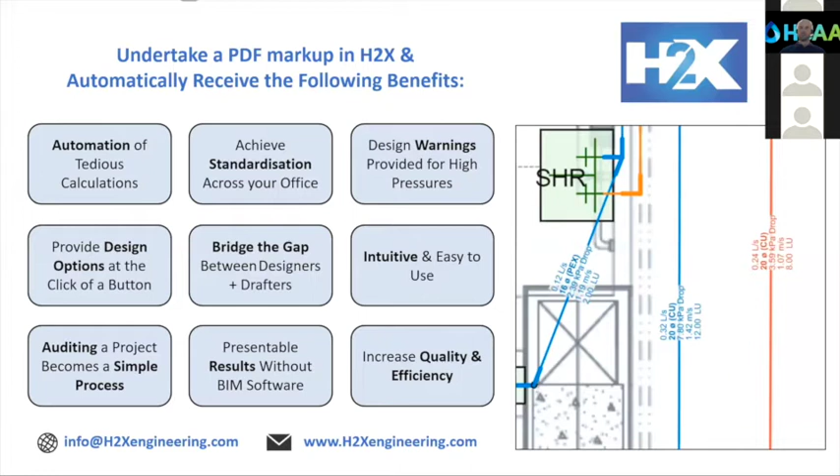So this one here, H2X, our next meeting we will have a presentation from H2X. This is one of our own members who has developed this software for pipe sizing with a bunch of other developers. I'll click this button and you'll see a video of how the software works. Basically, you use it through your browser. You load the PDF of the job you're working on, and then you can go in and pipe size and change between different standards. I won't run through it all, but we'll share more information at the next meeting. I'll show you a quick video on this now, it goes for about a minute.

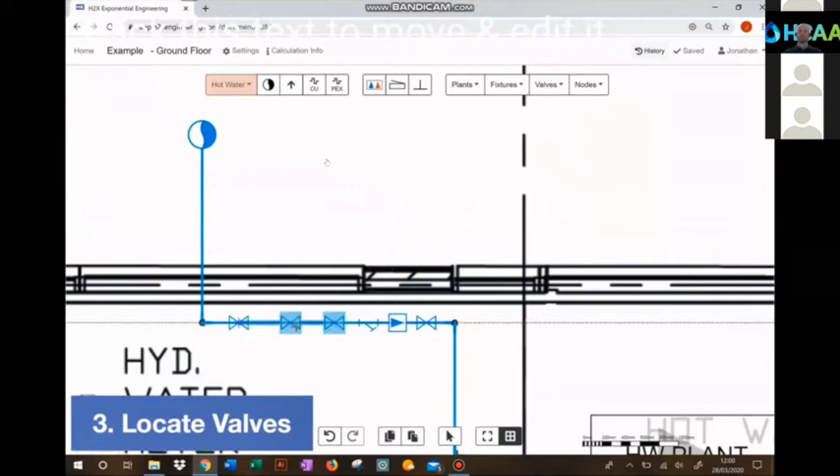Does an empty calculation folder sound familiar to you? How about drafting errors from unclear design markups? Or are you spending too many hours on a project? Introducing H2X, the digital transformation of plumbing engineering. An opportunity to revolutionize your workflows. A choice of innovation, or that is the way we have always done it, by following these simple steps: drawing lines that represent your pipe layout, stamping fixtures or nodes, locating valves, adding plant, and auto-connecting where required. You receive the following results: pipe size based on the chosen maximum velocity.

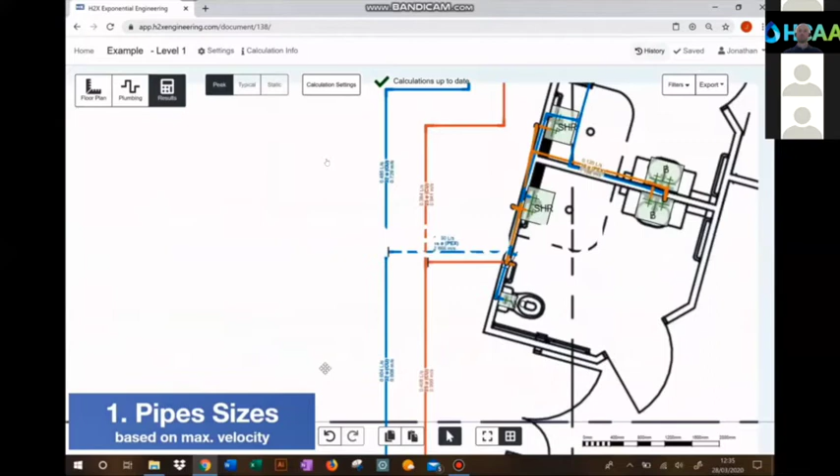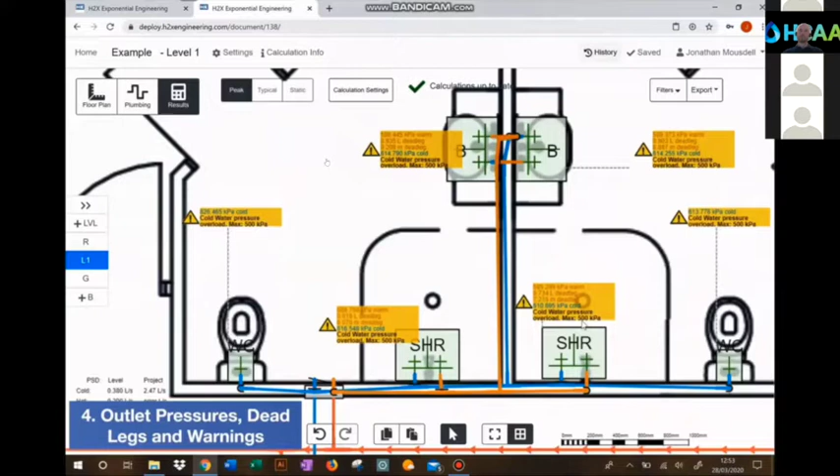Pressure loss through valves, fittings, and pipes. Hot water return pipe sizing, circulating pump duties, and balancing valve kV values. Pressures and dead legs at fixtures, including design warnings. And all results are professionally exported for your QA records. Industry-leading companies trust H2X, and they are already seeing the payoff. H2X is showing to take less than 27% of time comparatively. So choose to work smarter. Choose to empower your team. For only $29 per week. Choose H2X.

Okay, so there you go, that was a little bit of a preview of the software. I've used it on a couple of jobs now. One of the things I like, with where we're heading with the water research that we're doing, is the ability to switch between different international standards for pipe sizing and compare the Australian standard to an overseas standard. Depending on some of the data we're going to collect over the next 6 to 12 months, I think this kind of software takes us to places we haven't really been able to go before in a really fast and efficient manner.

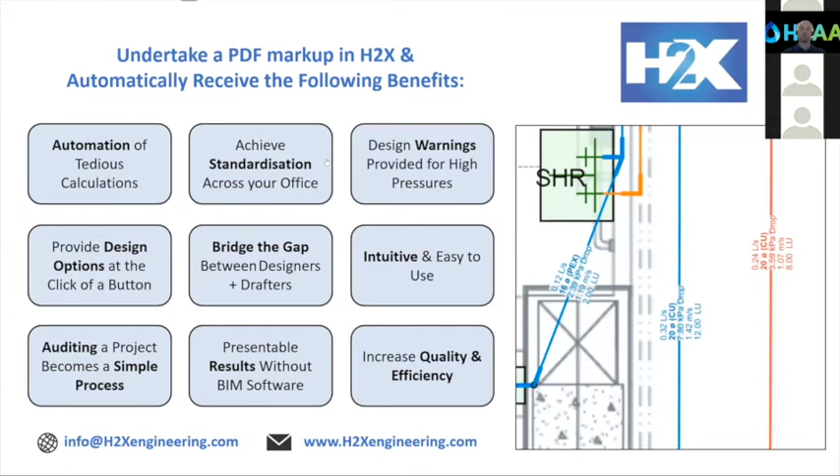For all the affiliates out there, we were planning, if we had this meeting face-to-face in Sydney, to have Stoddart come along - they've got a new toilet suite that they've released for prisons. The plan was a live demonstration as our CPD session prior to the meeting, put on some safety goggles and see if you can break this toilet. But because we weren't able to do this, this is Stoddart's opportunity to showcase a new product that I think is very creative. If you're an affiliate out there with a good new product you think would interest our members, please share it with us while we're stuck in this environment of online meetings. So hope you enjoy the video.

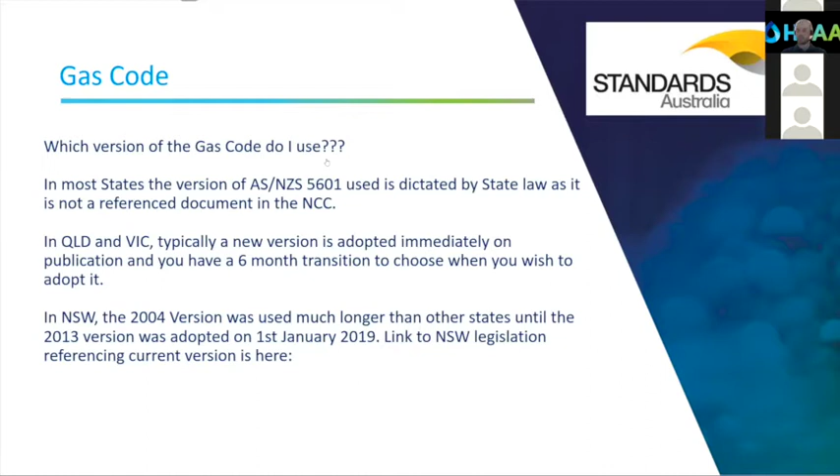I think New Zealand is the same as New South Wales, where they don't automatically adopt the latest version. So if you're designing interstate, make sure you're aware of what the rules and regs are in that state as far as gas standards go.

The next one was the performance solution templates. Pretty excited to get these out to all the members. These relate to box gutters, eaves gutters, valley gutters, flat roofs, and water system pipe sizing. An email went out with a link to download them from the website. You can see the diagram there from the BCA or the NCC. Standard process would be deemed to satisfy, which has an X over it in this case, and we're following the performance solution method. If you have any comments or suggestions for improvement, let us know. Those documents we'll likely put on the website as a live document that we'll update periodically to keep up to date with any changes within the NCC. The other thing we've made clear is that it's New South Wales specific. There will be slight variations in each state, so it's 99% there, but you'll likely need to make little adjustments depending on where you are in Australia.

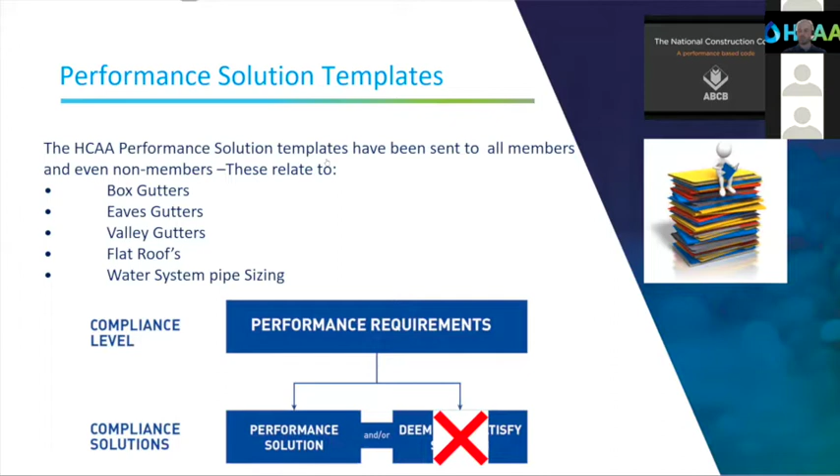We did pay for those documents to be created with members' money, but we've also made them free to anyone in Australia. If you live in another part of Australia and want access to those documents, just get in touch with us and we'll share them with you.

Rod's going to touch on this after the meeting, but the diploma is relaunching in July this year, delivered face to face. The cost is around $26,000 to complete. In New South Wales you get a subsidy of about $18,000, and the plan is that with the cadetship we will cover the difference. What we'd like to do is eventually push for federal subsidies so that no matter where you live in Australia, you can access the subsidy. At the moment we can only achieve so many things voluntarily, so that's on our wish list. The cadetship has 3 positions available, open to anyone in Australia, and Rod will touch on this in more detail.

Sorry, Nick, just to go back a couple of slides, I wanted to clarify - are you saying the alternative solutions are free for everyone to use, even for stormwater downpipes and gutters? Correct, that's right. Oh, that's fantastic, thanks mate. No worries. Is that members only? No, not members only, it's anyone.

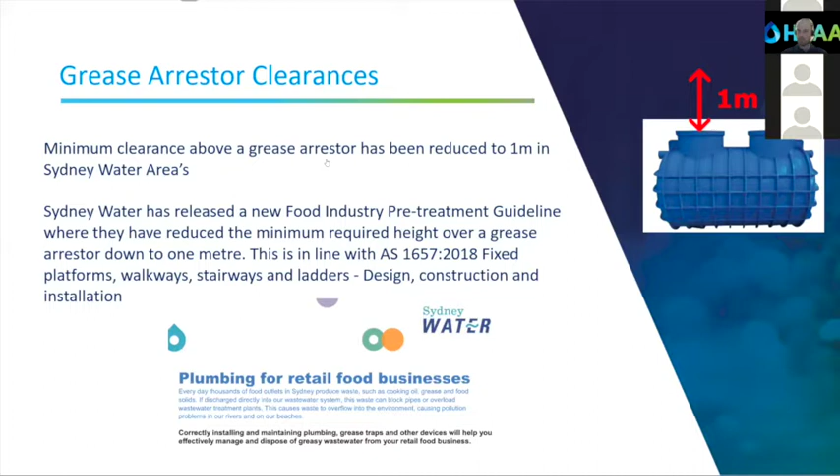So grease arresters - Sydney Water have released a new food industry pre-treatment guideline. The rule used to be that the depth of the grease arrestor required the same clearance above it. They've now reduced that to 1 meter. We've sent an email out, or are about to send one, with a link to that document. Thanks to Bert de Kaiser, if you're in the room, for sharing that with us. Hopefully that helps a few people out on their next job.

This one is a bit of a curly one. It's popped up on 3 jobs that I'm aware of in the past couple of months in New South Wales. Now that I've mentioned it, it will probably pop up elsewhere, so I apologize for bringing it up, but it's important for those currently designing to be aware of it. In a non-sprinkler protected building, all hydrant brackets must be fire rated. This has been in the standard for about 20 years, it just hasn't really been enforced. It did come up about 5 or 6 years ago, disappeared, but now it's back again. The brackets must be tested in accordance with AS 1530.4. A lot of brackets are fire rated, they just haven't been tested in accordance with that standard. So it's a technicality - unless it's tested in accordance with that standard, you can't install that bracket in accordance with the code.

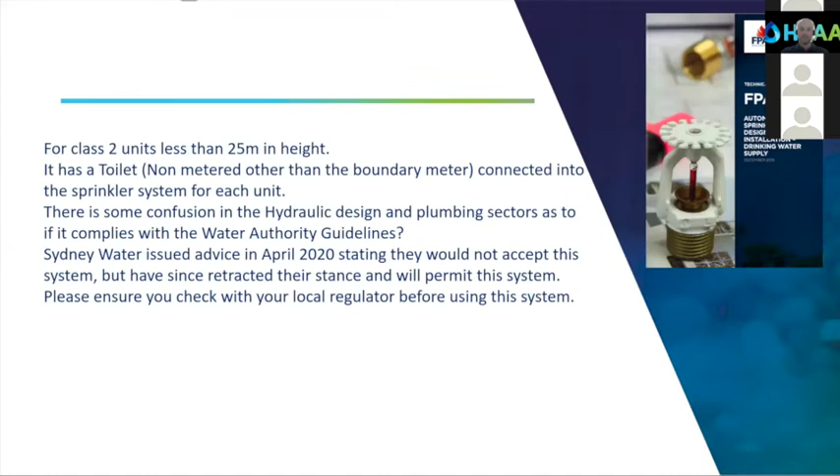There is a method they do use now - two 10 or 12 mil Booker rods individually tested with the uni strut that's individually tested. So the two individually tested systems combined tend to be allowed because they both individually have certification, but as a package, they don't. So what they do is provide the individual Booker rod and the individual uni strut, doing two Booker rods down and then hanging it on top of the uni strut.

Maybe you can email me some details on that, and we can send some options around to members. It sounds like everything should be noted in a fire engineered solution though, to be safe, not sorry. Correct, yep, and it has to be accepted by the private certifier.

You'll find that the certifier won't accept separate certificates either - I've had that in a couple of cases.

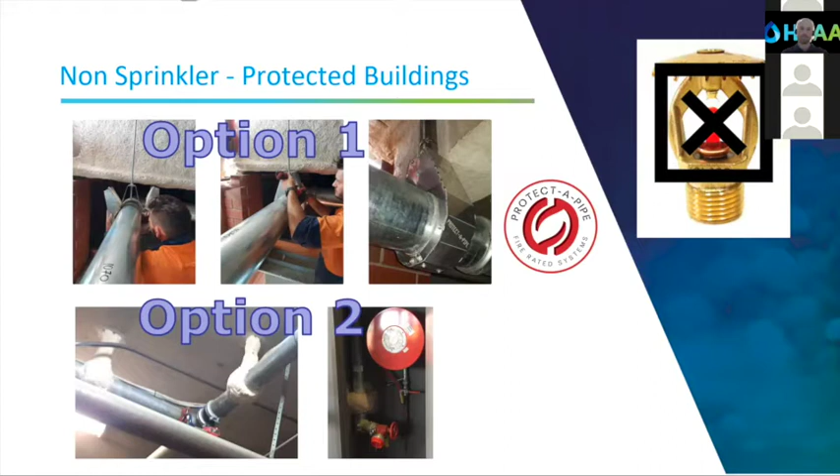All right, so this next one, we put this up at our last meeting. We did get a letter from Sydney Water advising that they wouldn't accept the FPAA 101D system. About 24 hours later, we got another letter advising us that they've retracted that letter and they will accept it. So this is just a bit of advice to make sure you check with your local regulator that they are happy, because some of the regulators weren't fully across the detail of this particular system.

That toilet unmetered while the rest of the apartment is metered.

Is this telling me the default microphone has changed? Oh, hopefully people can still hear me. Okay, so we'll skip past.

Hey Nick. Manufacturer this standard. Nick, you're dropping out, Nick. Yeah, Nick, you're going missing. You got me now? Yeah. Just back on your last slide there. Can you hear me? Your default speaker has changed. You're able to turn off your video and just keep your screen with the Prezzo. Yeah, I'll try that, stop video. Is that better? Can you hear me now? Yep, yep, okay. Oh no, as you vanish. No, he's just in and out at the moment. Maybe if I unplug this.

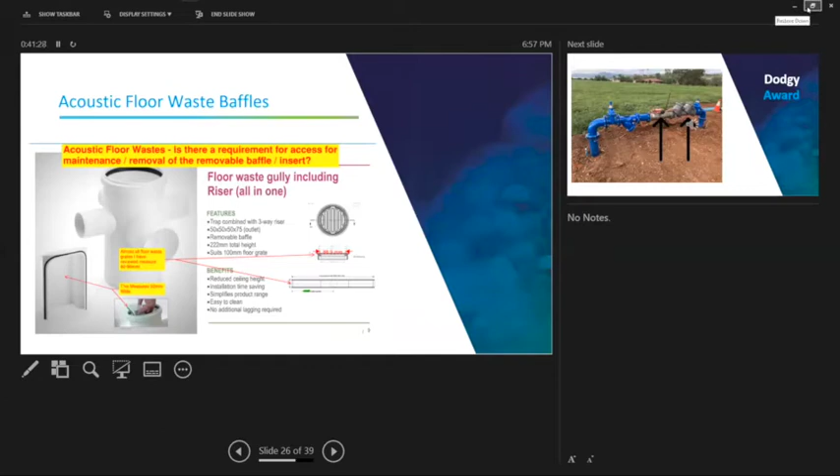With the 101D fire sprinkler system, I think that'll be an interesting challenge in some states where there's specific requirements for fire practitioners to undertake installations, not plumbing contractors, because given that it's coming off a toilet system, it really is a cross between two very independent and separate trades. Who knows where the certification lands between the two? One's supplying pipes, the other's supplying pipes and wet sprinkler heads off those pipes. It sounds fraught with danger.

Yeah, so there was guidance. I don't know about other local regulators, but in New South Wales, Fair Trading did put out a guideline last year stating which elements of that system are plumbing work and which elements can be installed by a fire sprinkler fitter. So it's a mixed system. If you go to the Fair Trading website, if you're working in New South Wales, they give guidance on who can install which part of that system. It'd be interesting to see where it goes as far as certification of the installation. So, I think keep fire with fire and plumbing with plumbing - it probably keeps it simple.

Another thing we were advised of, it isn't in their current metering guideline, but someone contacted me yesterday to say it may be going in. Again, this will be each local regulator - I live in Newcastle, so there's nothing within Hunter Water's guidelines on this system. It'd be interesting to hear what's happening around Australia with that particular system.

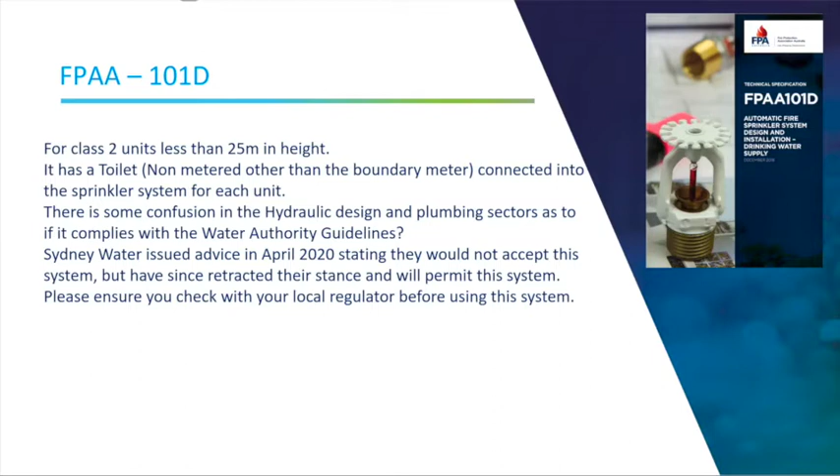Okay, so this one was - you probably started to break up before - but this was a prototype room I looked at for a job in Newcastle, a hotel.

We realized that the floor waste opening was smaller than the baffle for the acoustic floor waste, in this instance, for this particular brand - the Rehau one. The baffle could be trimmed on the sides at the top there, and we could get it down to 86 millimeters, so it's just small enough to be able to remove the baffle. But it's a precautionary note that if you are specifying acoustic floor waste on your job, check what floor waste the architect has, so that baffle can be removed for cleaning.

And this included grated drains. So whilst your opening might be 100 mil, underneath the grate itself, I looked at about 5 or 6, and they all measured around that 88 to 89 millimeter mark.

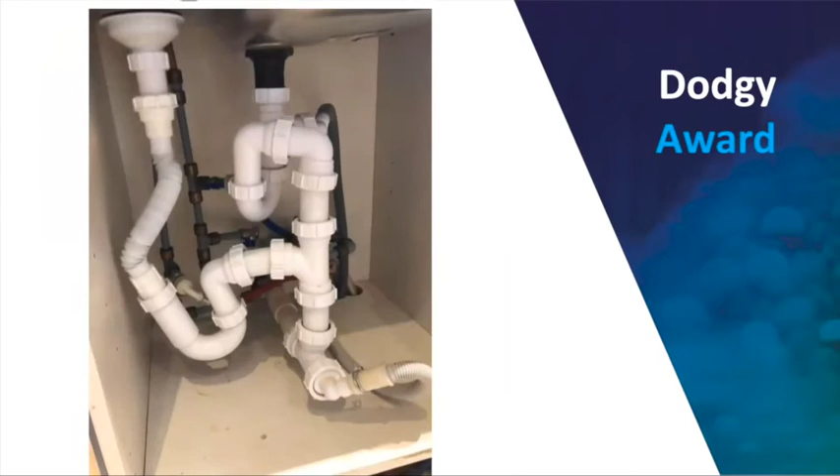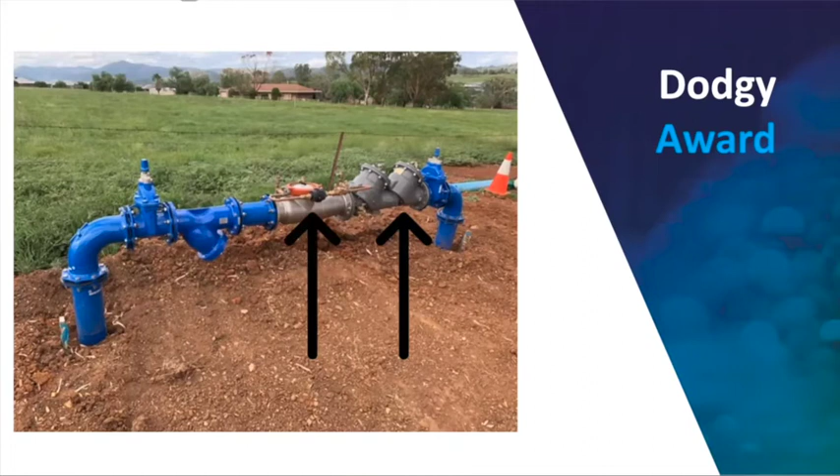All right, hopefully that worked out all right for everyone. It wasn't too long, but thanks for sending in your photos. I rehashed some from the Sydney meeting because since this COVID thing's come out, I only got a couple of photos in. But thanks to Brad Freeburn for sending in this double testable check valve. I think there'll be slightly higher friction or pressure losses on that job than most, so I'll post a hat out to you, Brad.

Were they all since the last meeting? No, they were played at the last meeting, other than about 3 of them. Okay. Yeah, I rehashed them because I didn't get many this time since everyone's been in lockdown, so there haven't been many photos being taken.

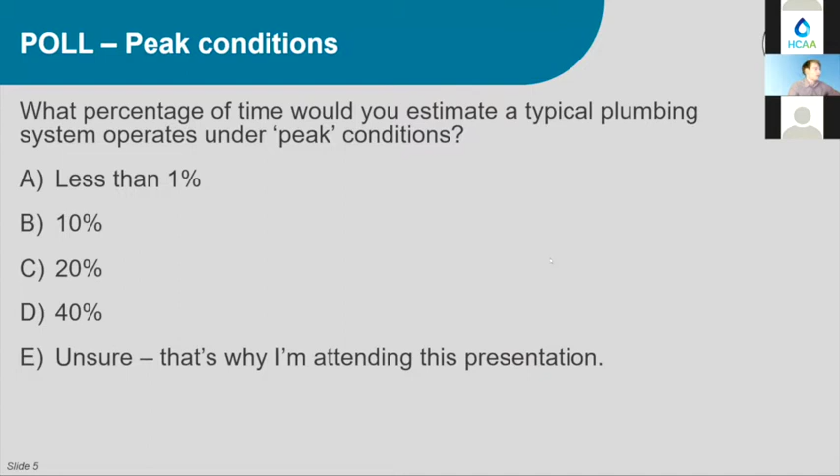Just to give you a quick background of how the partnership came about: in July last year we began the project based on limitations to high-rise plumbing design. Through our literature review, we came across some pilot study results presented on the association's LinkedIn website, and in initial discussions we found we had a common interest. Nick alluded to the fact that, being a volunteer association, they were potentially a little hamstrung for time, and that's where Deakin offered our services, as we had a bit more time. I could focus on presenting the results and organising all the data into a presentable format for the association to replicate and put out towards industry.

So just a quick overview of the water demand investigation: currently there are 4 buildings being monitored, 2 in Sydney and 2 in Canberra. All this data is open for public access, and it's pretty much just a matter of going directly to the association, sending an email, and you can get the credentials to log in and pull the data down.

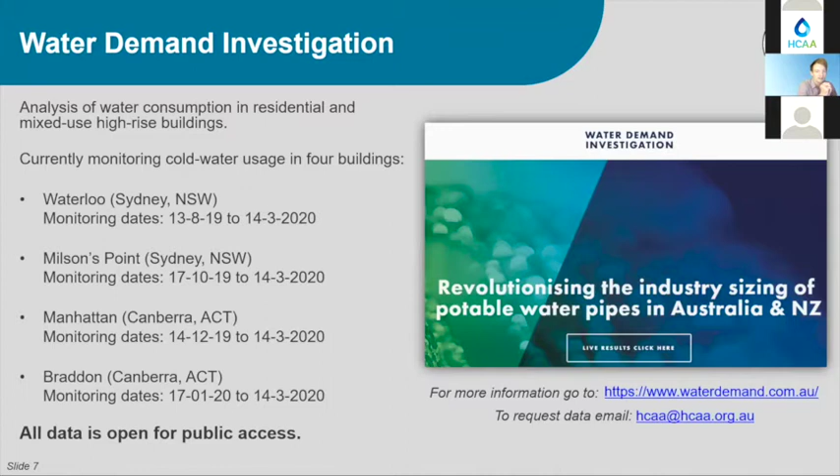So the project's key goal is to assess the suitability of AS 3500 and how efficient it is in estimating probable simultaneous demand, which is the peak hydraulic demand, for those joining us from other countries. Also, to develop a stronger understanding of water usage in Australian high-rise or multi-level residential buildings. And, as Nick alluded to, with the future vision of the project: improved design practices, reduced cost, and plumbing system efficiency. There's also potential there for improved water quality regarding Legionella, lead, and biofilms. This information will hopefully aid in the development of performance-based solutions, and eventually update the Australian plumbing codes and standards.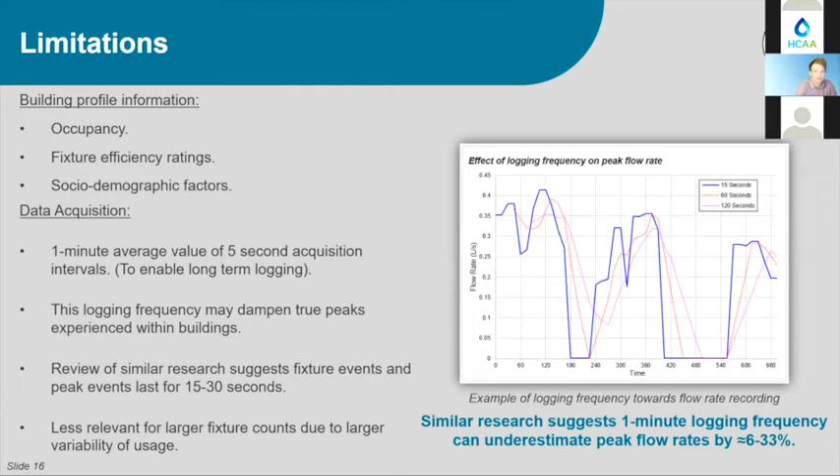Jumping into the results, Waterloo, 145 apartments, the peak flow recorded was 2.3 litres per second, which is 23.4% of the flow predicted using AS 3500.1. Milsons Point, 119 apartments, peak flow rate 3.1 litres per second at 35% of AS 3500. Manhattan, 330 apartments, peak flow of 4.6 at around 25.3% of AS 3500. And Braddon, a mixed use building, is 2.35 litres per second at 28% of the predicted peak flow rate using AS 3500.

It's worth noting too that the peaks, and then you can see the average daily peak, there's still a considerable difference in relation to those, and it'll be more relevant as we move through the presentation why that is.

Based on the potential errors associated with or limited information with the 1 minute logging, allowing for about a 35% correction, the flow rates were between 32 and 48% of PSD using AS 3500.1.

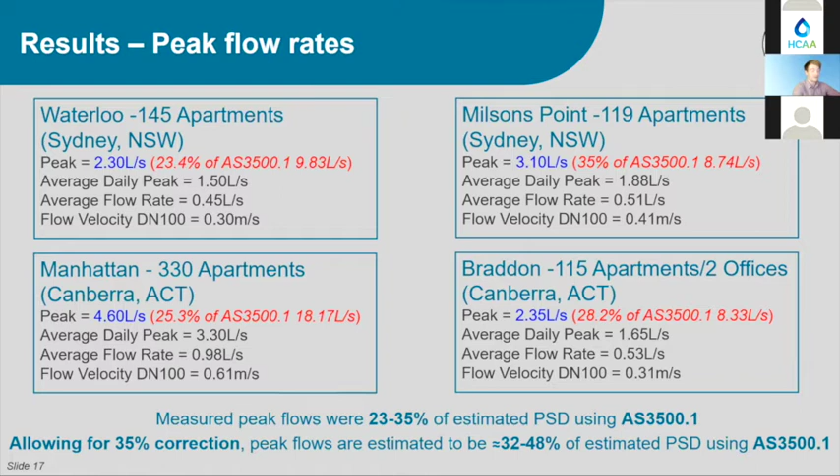A quick analysis of the average monthly building water consumption was conducted. You can see there's a fair bit of variation initially.

You can already see potentially with the Waterloo building, shown by the red line to the right here, there's a fair drop from November to December. We believe, although it hasn't been confirmed yet, there's a number of international students that reside in this building. Potentially they've gone home or back to their original countries for holiday periods, and then haven't been able to come back due to travel restrictions from COVID. Of course, this is just speculation at this point and needs to be confirmed at a later date.

You can see that most buildings show a bit of variation between their monthly consumption, but the data agrees well with the average usage. If we look at the bottom here, between Sydney and Canberra for litres per household, this data takes into consideration outdoor usage as well, so there's probably some allowance for that, but it suggests the data we're collecting is fairly accurate as far as water consumption.

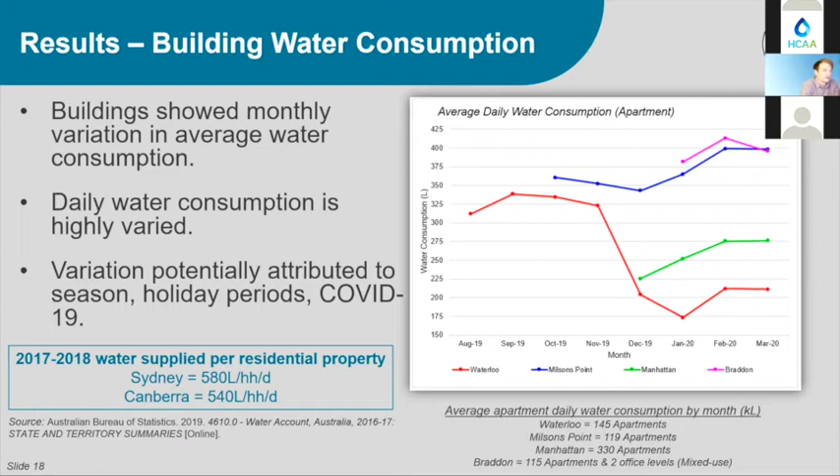We've also looked at the daily usage pattern and behaviour of the buildings and their flow rates. The typical residential building saw a sharp peak in the morning around 6 to 9 a.m. Then moving into the evening, around 5 to 11 p.m., you have a more flattened peak and reduced consumption during the middle of the day. This is strongly correlated with bathroom, shower, and toilet use in the morning, and then before and after work and school hours.

Interestingly, the Waterloo building, which again had the international students, showed a shifted pattern, with peaks actually existing at 12 a.m. and 12 p.m. during the day. So it's a little different, which I'll show in a second. Braddon, a mixed-use building, displayed less prominent peaks, obviously because there's probably increased water usage through the middle of the day.

Just to give a quick rundown of what these charts are displaying, we're looking at the maximum, average, and minimum values recorded for a specific time of day over the whole monitoring period.

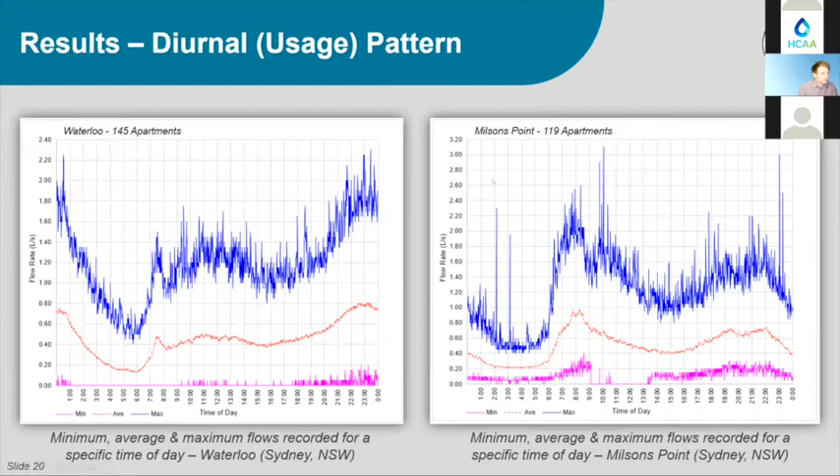As I alluded to before, you can see the Waterloo building peaks are around 12 a.m. and 12 p.m. Milsons Point displayed probably a more typical daily usage pattern of a residential building, and this was the same for the Manhattan building. Then with Braddon, you can see a slight increase as the morning hours came before work and school, and it plateaued across into the evening and then dropped back down.

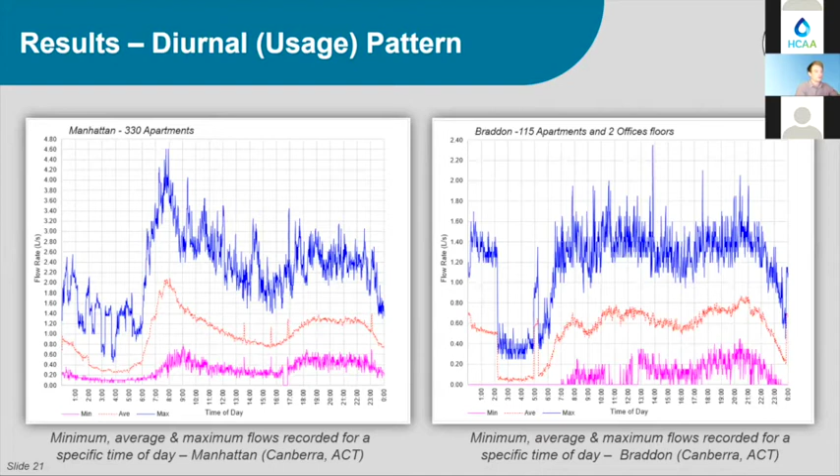Just to give a quick overview of the potential impacts towards water consumption in the buildings due to COVID-19. Looking at the Google and Apple baseline data, we can see that we've been driving, walking, and using public transport a lot less, and spending a lot less time at workplaces and a lot more time in our houses.

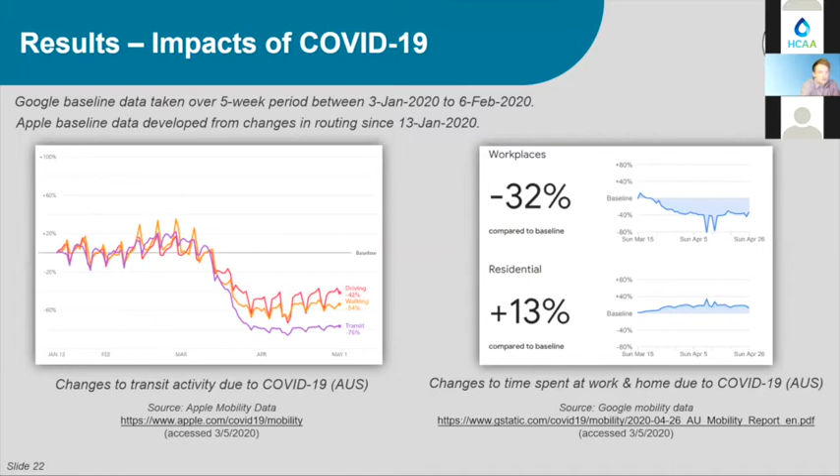Interestingly, we can see that the peaks aren't as prominent in the buildings, and we believe this is because you're not restricted to potentially having to shower at a specific time and get to work on time. With more people working from home, you're potentially more flexible in using a shower or bathroom in that manner.

Interestingly, though, the average flow rates of the building were increased, as we can see by the light orange line here, and we believe obviously there's potentially more water being used during the middle of the day. Buildings also displayed an increased water consumption overall, probably around 30 to 40 litres extra on average per apartment.

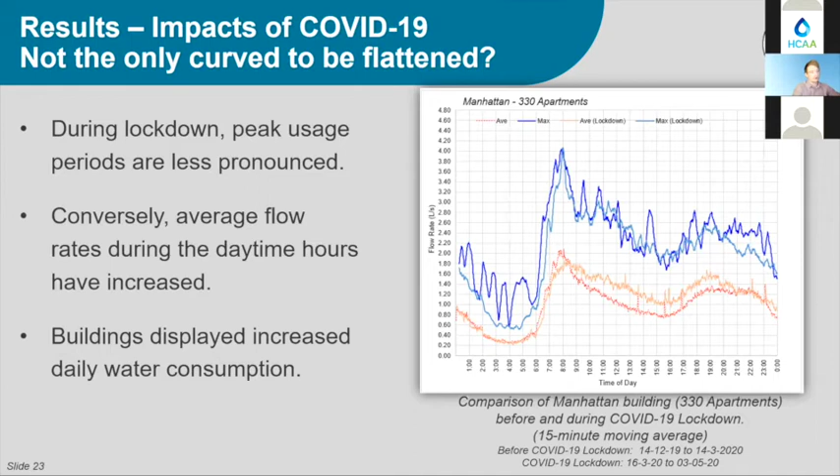To put that in context, for the Manhattan building in Canberra, which has 330 apartments, the peak flow rate for that building was 4.6 litres per second. For 98% of the time, all flows recorded were under 2.8 litres per second. Breaking that down further, about 70 to 90% of the flows were less than 30% of the recorded maximum. So we can see that the buildings are very, very rarely subjected to a peak and spend a lot more time at lower flow rates.

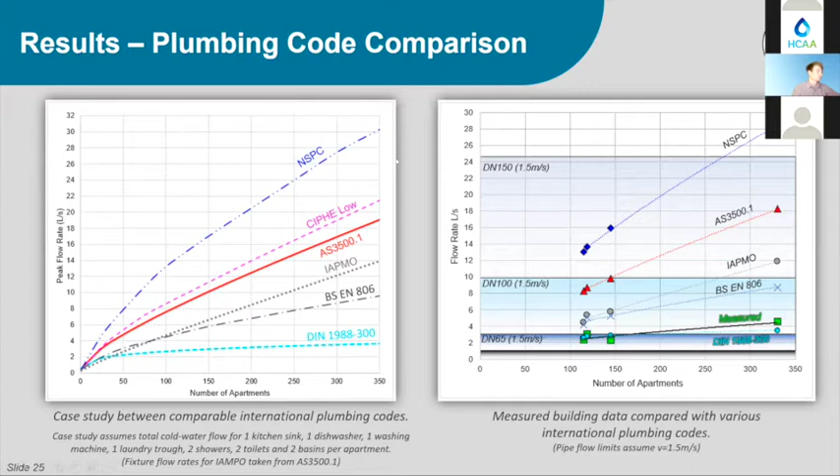Just to go through and highlight a few supporting research articles that we've discovered through the project. Internationally, there's a numerous amount of studies that have confirmed that a lot of the international plumbing codes overestimate peak hydraulic demand - this is in the UK, USA, Brazil, Belgium, Netherlands.

From Australia's point of view, I believe this is the first public investigation as far as studies that have been conducted into measuring multi-level residential water consumption. We can also supplement our data with residential end use studies, which investigate the indoor and outdoor fixture usage of single or detached residential dwellings across Australia.

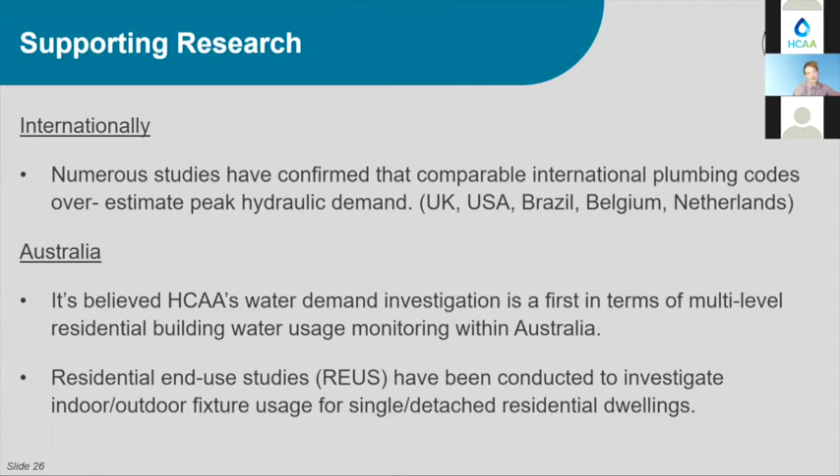Just a couple of examples of the supporting research at an international level. We can see here the findings from the LUNA project conducted by Heriot Watt University. They did a fairly extensive case study of 14 residential apartment buildings of varying sizes. As you can see from the results, a lot of the codes they've completed a case study with overestimate the peak hydraulic demand.

Moving to the US, there was a fairly significant investigation into monitoring 43 buildings, all with various usages, and believed to have water-saving fixtures. Of the 43 sites monitored, 29 of the sites could have had a smaller pipe size and not violated the plumbing code velocity of 10 feet per second or 3 meters per second.

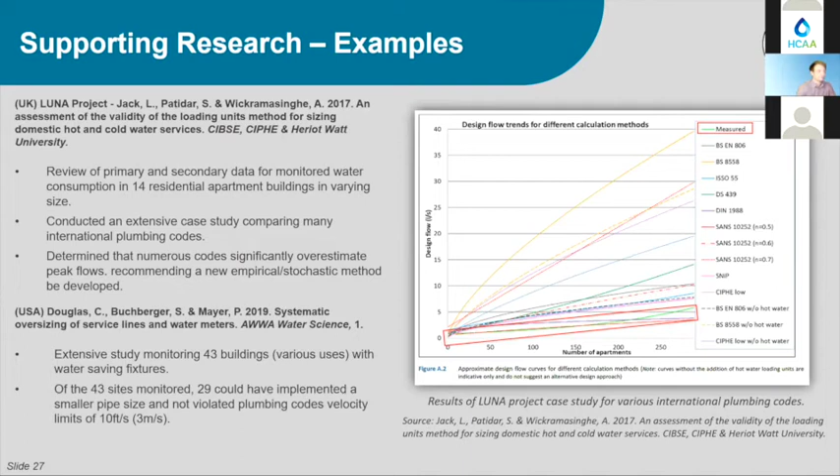We can use this to develop behavioural patterns at a residential level, and also combine it with supporting information such as income levels, household size, household or family makeup - that information can then expand and determine what actually impacts water usage in residential buildings. Some additional supporting research as to why plumbing codes potentially overestimate peak hydraulic demand.

For those who aren't familiar, the foundational methods were actually developed in the 1940s. While the research conducted wasn't necessarily wrong, it was based on monitoring hotel buildings, which may not accurately reflect fixture usage in residential buildings. Moving forward, plumbing technology has improved and we've seen increased adoption of water-saving fixtures.

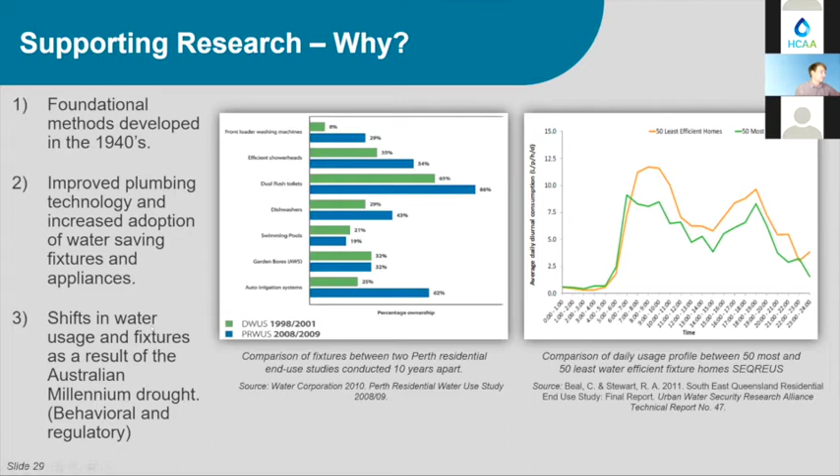So to conclude, the study so far shows that AS 3500.1 overestimates the peak simultaneous demand in residential buildings. We can also take from the information that plumbing systems are very, very rarely subject to peak conditions.

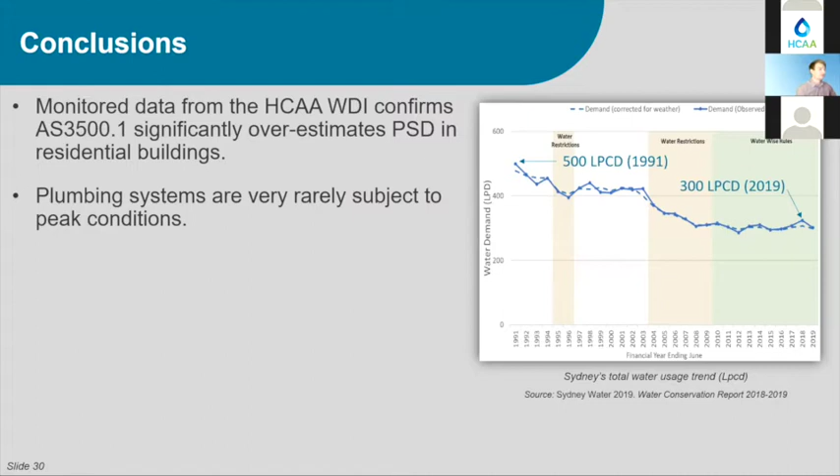Some implications of this: an overestimated peak hydraulic demand promotes oversized systems, which leads to increased construction costs, elevated energy consumption, and potentially incorrectly selected pump duty points leading to low efficiency pump operation. If pipes are oversized, hot water systems also require more energy to maintain temperatures.

Moving from that, there's potential for reduced water quality due to low flow rates. Lower flow rates can increase water age, which can mean less residual disinfectant. Lower velocities also potentially allow for increased biofilm growth, which can give a home for Legionella and other pathogens to develop in the biofilm.

Additionally, there's a greater risk of premature failure of plumbing hardware and fixtures. This is because valves or water meters aren't subjected to the required or designed velocities that were first thought the building would experience. There's also research suggesting flows aren't high enough to properly cleanse systems of built-up air.

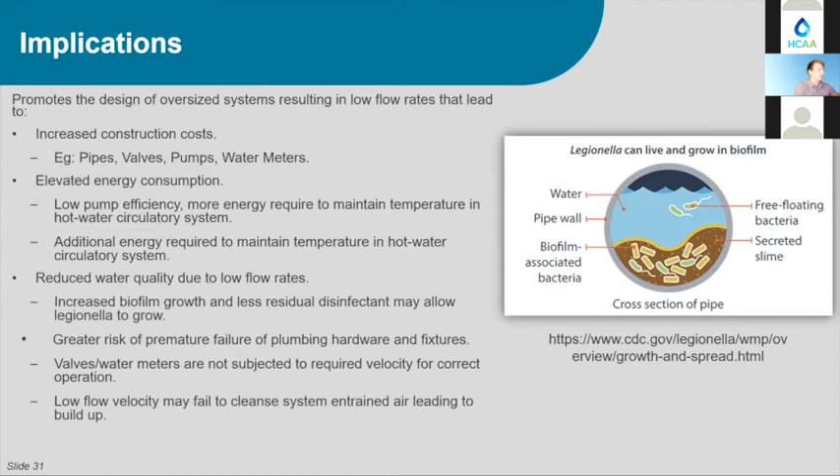For future work, the intention is to continue monitoring the buildings and obtain better building information as far as occupancy and fixtures, and to look more deeply into the Australian and international residential end-use data.

Running alongside the project, we'll probably produce a report for the Australian Building Code Board. It's also the intention to submit the findings of this investigation for peer review and publish in an academic journal, and hopefully move forward with a PhD and research degree into early 2021.

Further from that, I believe Nick has the intention to move to monitor different systems, possibly hot water systems and healthcare. So it's not just limited to residential and cold water; there's the intention to move into other building types.

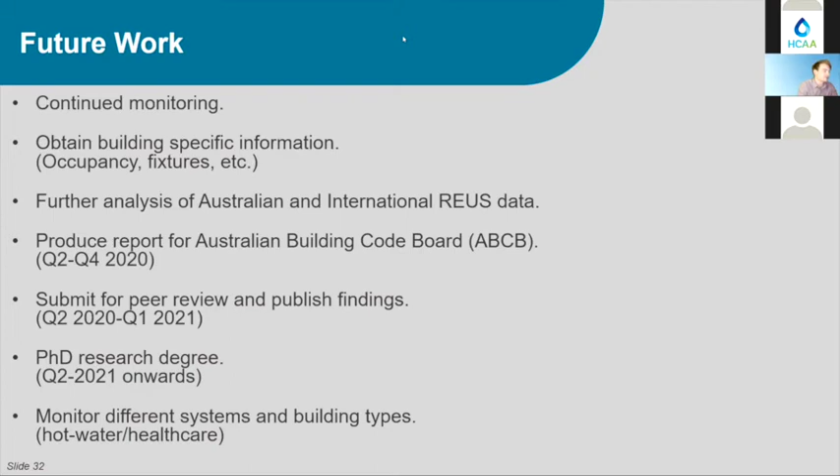Some future considerations for the industry: a lot of the research to date has a pretty strong focus on peak flow estimation, and potentially fails to consider what the effects would be of a plumbing system when the size eventually becomes reduced.

At the moment, flows are currently so low that transient events or pressure surges might be masked. As system size reduces, pipe flow velocity will obviously increase, and higher velocities will be more frequent within the system. This will result in a need for stronger consideration towards the unsteady state of flows and transient events, to make sure systems are safe and not subjected to major pressure surges.

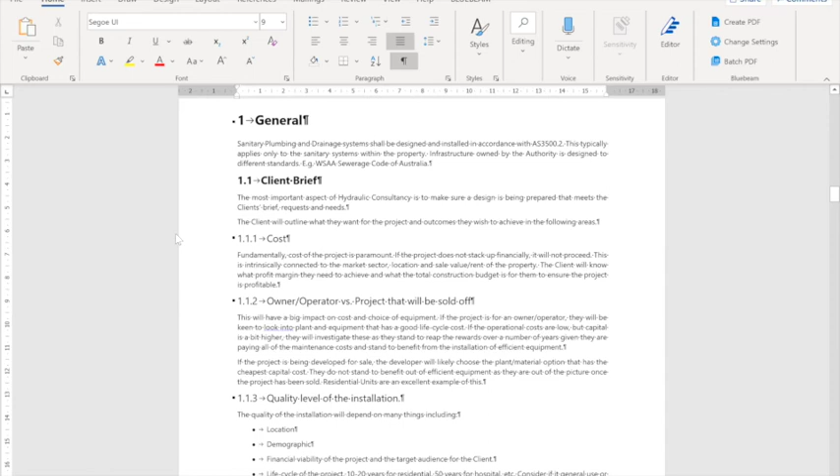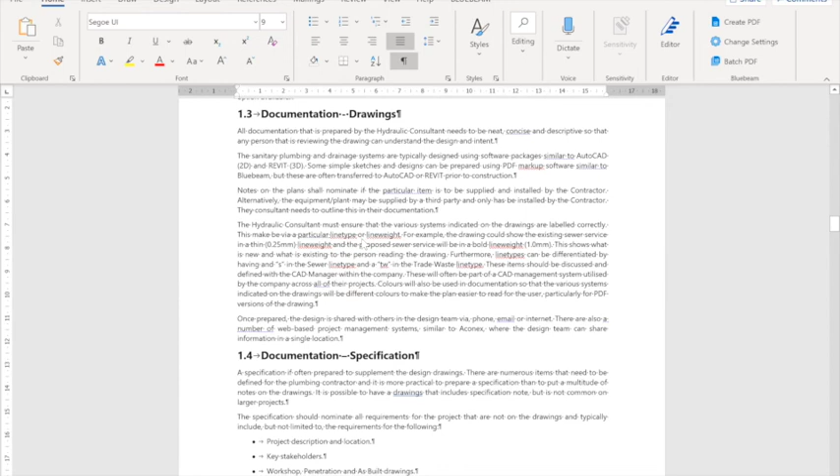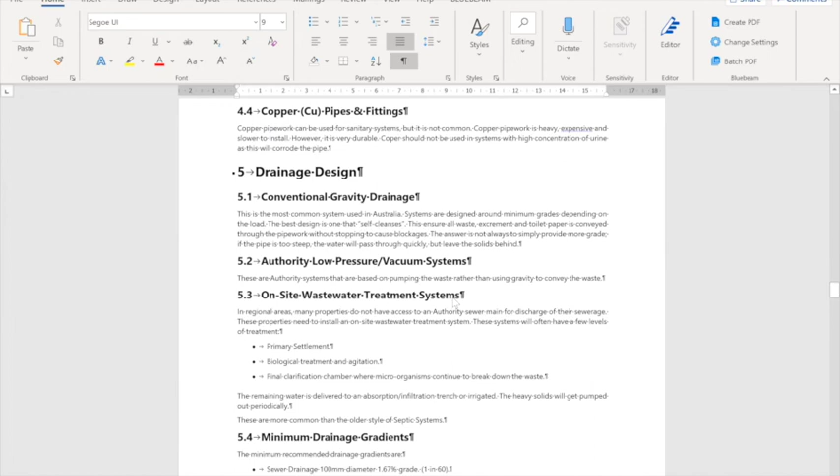So what I've got on the screen is an example of the topic notes we'll be providing to the teacher. This started out largely intended to be just some key topics with maybe a sentence or paragraph about each, which was a lot less than what we'd love to do, but that's what the funding allowed. For some of them it's developed a bit more based on the hours. If I scroll down, it really starts looking at regulations, documenting specs, definitions, commonly used phrases in each discipline, pipe supports, materials. This particular topic notes is for the sanitary drainage subject or unit.

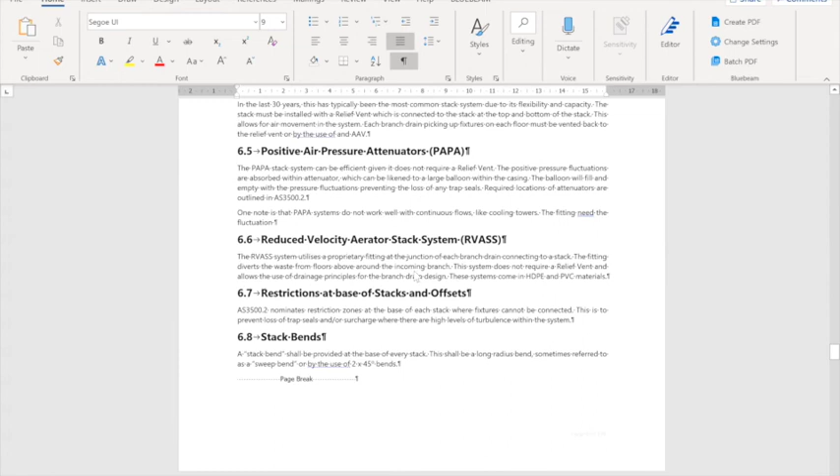It looks at some of the basic things like pumping stations, rising mains, venting, air admittance valves. At the moment that's pretty much what the teacher is going to get, and they'll be expected or required to develop these into actual sessions online and in the classroom.

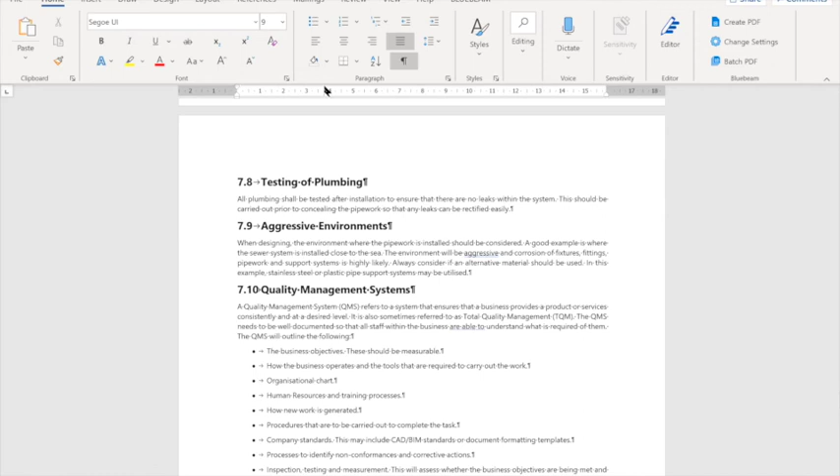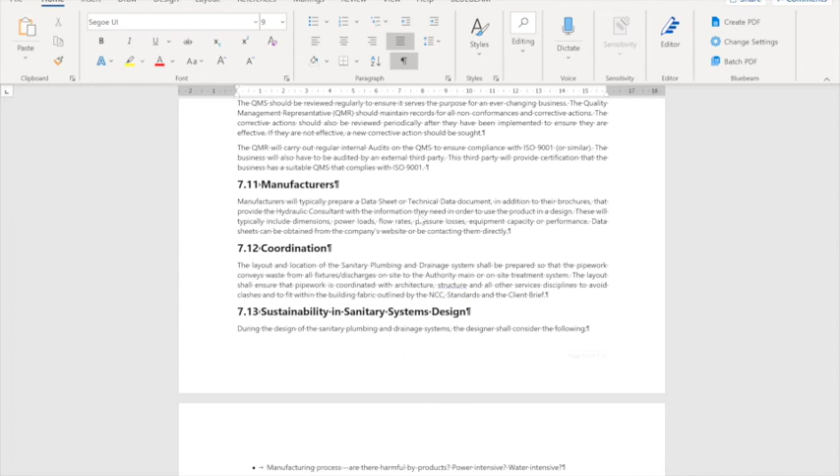So my hope is that once we get this whole course up and running - and this is very much the start point - I'd be really keen to get more funding available through state government and develop these a bit further, so they're a much more comprehensive set of course notes that can be handed over to students to help them into their careers.

One of the other things I wanted to show you was an assessment. Oh sorry, I haven't got it open, my apologies. Please bear with me while I just open one up.

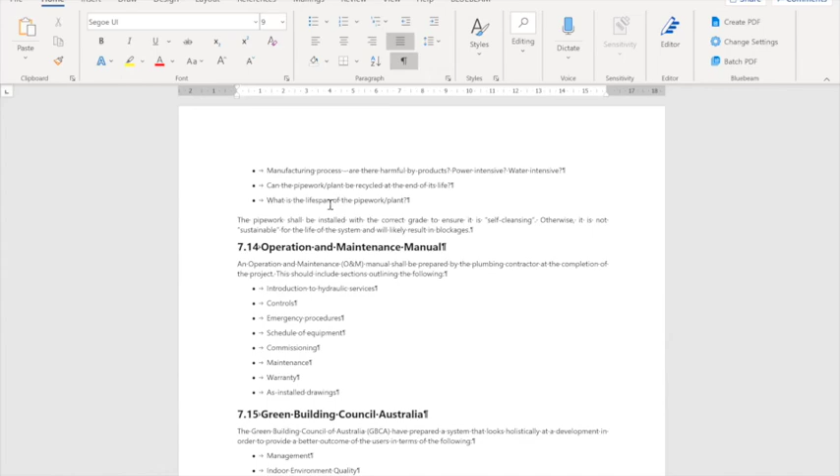So largely for the major design, for each of the... sorry, it's telling me - can everyone see that? It's telling me my screen sharing is paused. Yeah, it's not showing it, mate. Oh, I can't see it. What's that? Yeah, that's good. We got you.

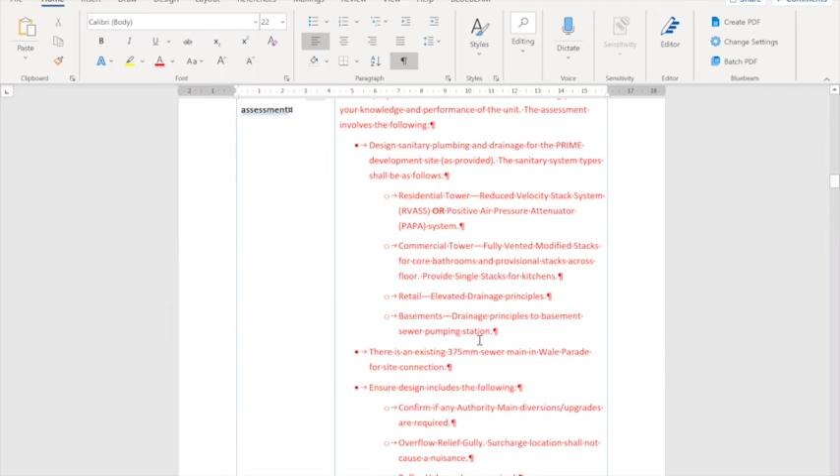So for example, there's a 30-story residential tower, a 30-story commercial tower over a floor of retail and a couple of basements. They've got to design the sanitary systems for those. The resi tower can either be an RVASS or a PAPA system, and the commercial is fully modified with some single stacks for kitchens. So the point is we're asking them to design a variety of systems and make sure they understand everything that's in the standard.

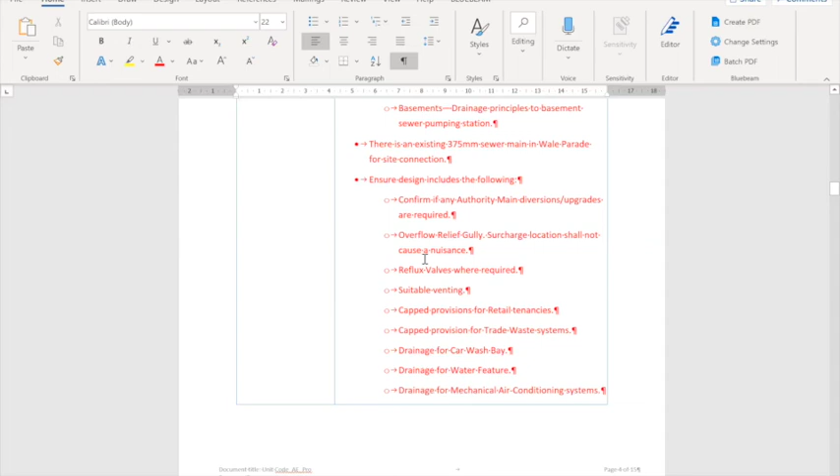And of course, that goes into making sure they've got provisions for all the retail tenancies, the car wash bay, the water feature, air conditioning and stuff like that. So that gives you a bit of an example - all that stuff in red is things that we've added.

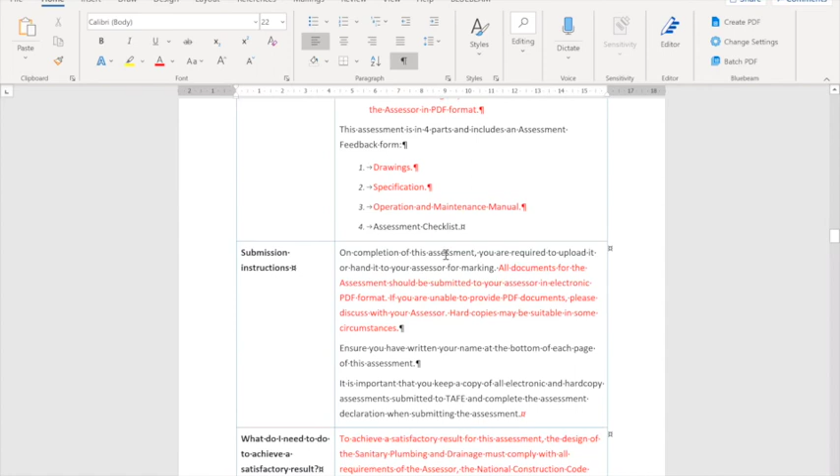Anything that's in black is part of the standard TAFE document. So typically with these major designs, they're going to do a specification. And what we've also done for TAFE is provided a standard, very basic specification. It's by no means complete, but gives the guys and girls a bit of structure on what they need to do.

We talked to TAFE about that. They were okay with it, given that if a junior walks into a consultancy office, rarely would they be asked to prepare a specification from scratch. So they didn't have any issue with giving a student a template. We've done the same sort of thing with a really basic budget estimate, and a return services brief. So there's a few tools we're working on, in addition to the course notes for each unit, that TAFE can give to the students.

One of the other things we've looked at with TAFE is what they call their Moodle. This is a website platform where a student can log in and obtain all their assessments or their course notes. They've got access to things like AutoCAD and Australian standards.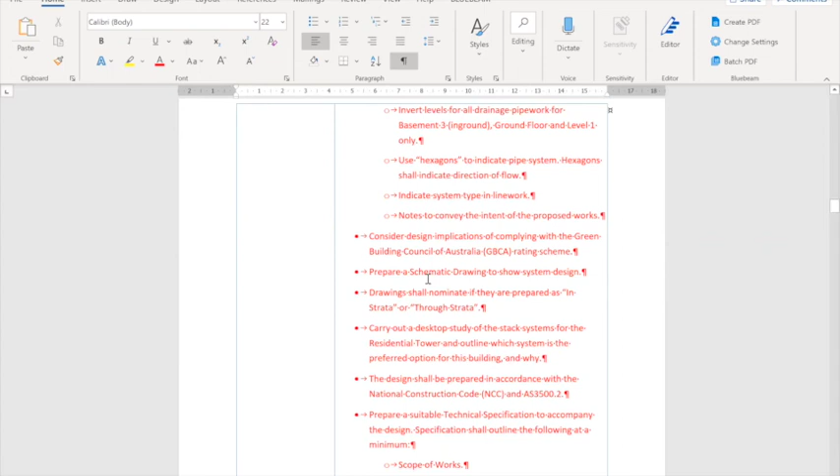In terms of delivery, we will be running the diploma and the Cert 4 as of July 2020. TAFE's going through the final hurdles of that right now. We don't know exactly when enrolment information will be available, hoping it'll be sometime mid to late June. That should be suitable, hopefully, for an intake or commencement of the diploma and Cert 4 subjects by late July.

To help us do that, we do have 2 new writers. I'm very happy to say that Jim Burns is helping us produce the gas subjects. Jim's been involved with TAFE for many years as a teacher, and really I think has only stopped teaching on account of the fact that we've now got to have this TAE to be able to do that. So he's going to help us prepare the gas subjects.

We've also got a guy named Andrew Taylor. He's going to help us out with the sewer infrastructure, and he's going to write that unit for us. Paul Smith and Scott Harris continue to write. Daryl Isles has done the cold water subject, but is choosing not to continue. And Michael Labib has taken on a couple of extra units, so he's now looking at the hot water, and will probably proceed into a couple of extras as well. So thanks to all those people involved.

The cadetship. In terms of the cadetship, we've now issued our information about it, distributed through LinkedIn and also issued to all the people that have shown interest to date. We've had a lot of interest through the HCAA website, with students asking us how to find out about it, what have they got to do, when is it. So I'm really happy to say that this has finally been issued.

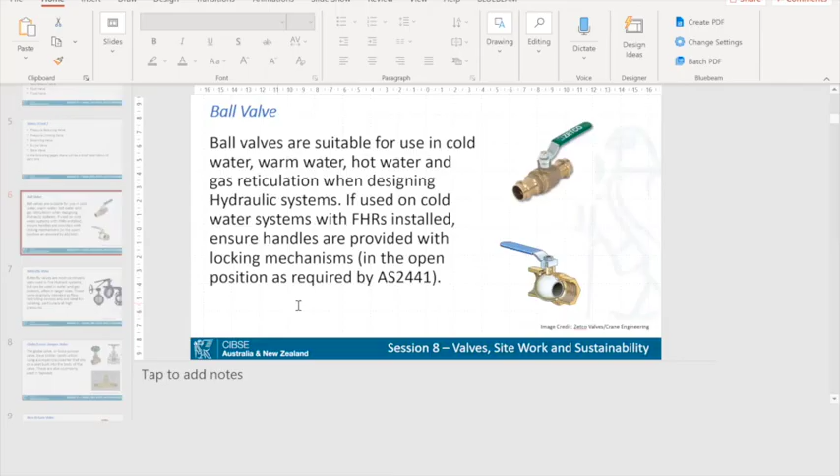We're just putting final touches on it, but it's going really well. And what's even better is the hydraulic guys are beating all the other disciplines, getting some good kudos, and putting the mechanical and electrical guys to shame, which is nice.

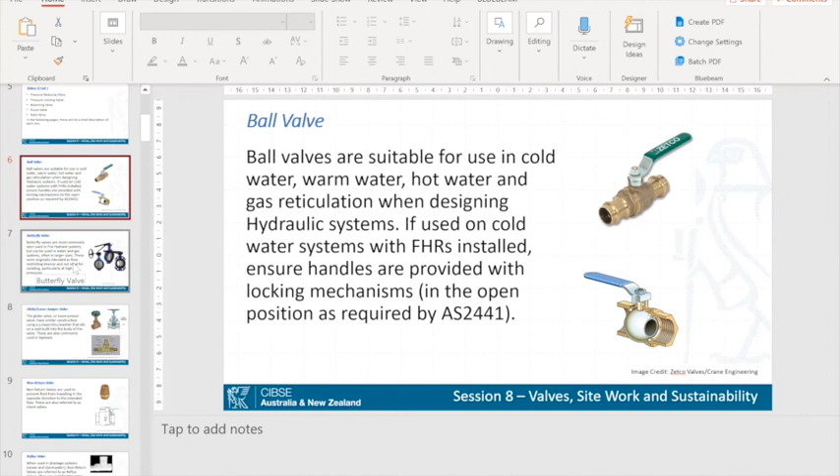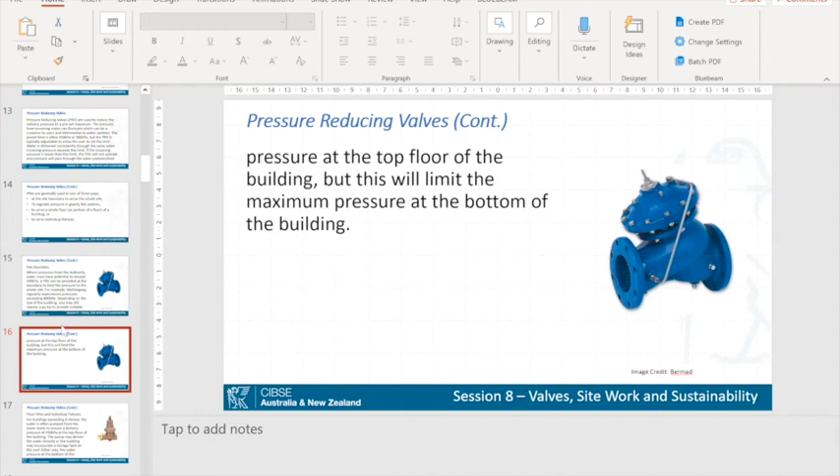This is just an example of the slides. We're really trying to teach construction managers and coordination services managers on site, particularly with builders, on the basics of hydraulics. We are not teaching them how to design - we don't want them to know how to design in that respect. We're just trying to show them what things are, what they're called, so they get the terminology and some of the limitations around things.

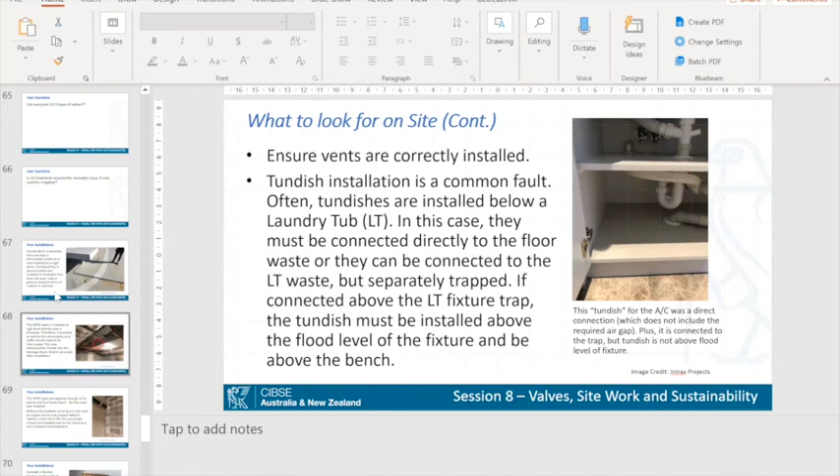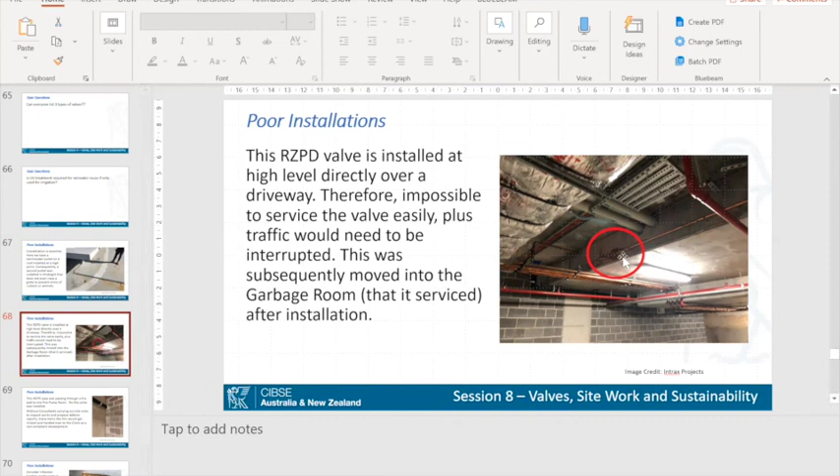A lot of the sessions are wrapping up with something like Nick's Dodgy Photos Awards, with examples particularly for construction managers of things they should look out for - RZPDs up at high level, shown in that one, no fire collars. That's a photo of an inspection opening in a hospital, which made me cringe a little bit.

But I think it'll be really good to be able to pass on this information to construction managers and make sure they have a better understanding of the hydraulic systems.

We're hoping to do a bit of a dry run with CIBSE in a little while, probably in the next couple of weeks - that's been affected by COVID, obviously, so we're playing that by ear a little bit.

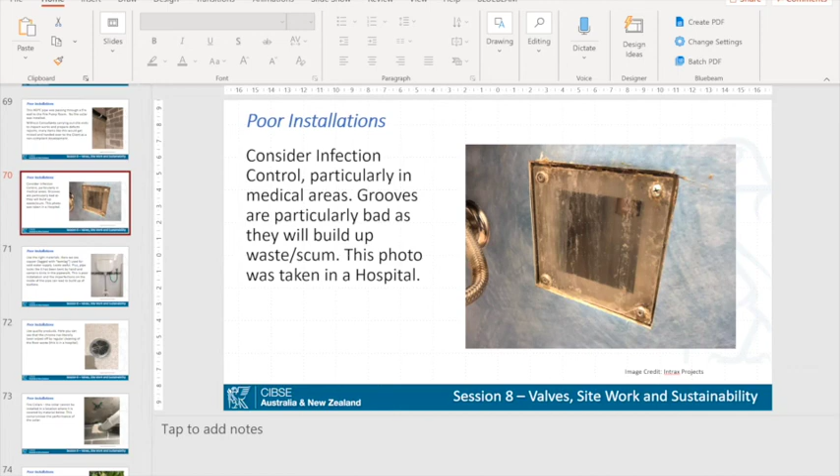Look, that's all I had, Nick. I tried to keep that short and sweet because we sort of run over a bit. But if anyone's got any questions or any concerns about education, let me know.

Thanks heaps for that, Rod. That was really good.